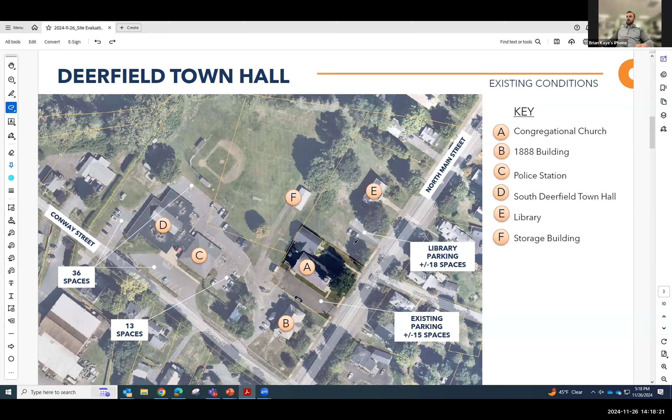Looking back at this slide, this is the campus. This entire area has 86 spaces, which includes what's already at the library in the 1888 building. But there's a scenario where they're going to gain one between those buildings, so we are basically plus 100 spaces.

I'm not worried about the difference between 86 and 87 because there's so many other changes going on. The 86 and 87 are essentially what's there rearranged in some sense because of other work going on, and the green number is additional. So with the 100, you're essentially doubling the amount of parking on the whole campus.

When you count it, you're counting that stuff northwest of that black dotted line. Okay, good, that makes sense to me. I didn't understand the difference between the 86 and the 87, but now I think I do.

Joyce, that target of 100 is based on, as Chris said, seven parking spaces per 1,000 square feet of senior center building. Okay, and then so if I look back at the two-story one.

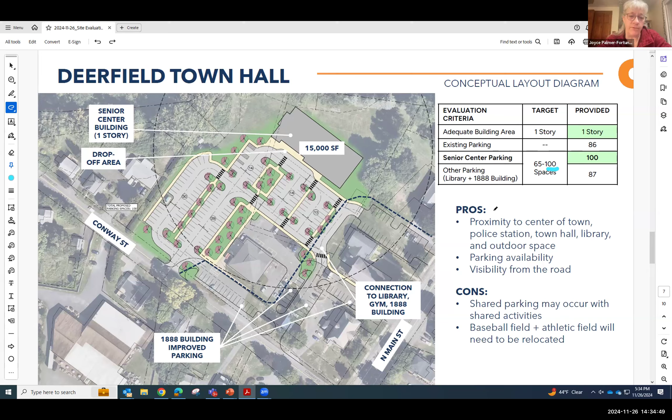So if you were to try to go for getting rid of this ball field, you'd have to factor in the cost of improving the other ball field to be one that people would want to use. Does that make sense to you, Trevor?

The thing about where the other building was, right next to the police department, I believe in the last designs you showed there would be no windows on that adjacent side, and that would cut down on a lot of natural light, which I really am in favor of.

You can put windows in, that's what we had, it's just he was thinking do we want to look out at the parking lot, but certainly we can drop them in. Not high up, but there's room.

The first story, if the back part is the second floor, that's not a problem, it's just the lower one that's right there, that he's looking at.

And we could probably be strategic about what we put up against the police station on the lower level, and try to limit it as much as possible. But you're right, Jennifer, there's definitely going to have to be most likely one space that would like glazing that's not going to get it.

That's my only thought. That's why I do like different other positions, but I don't know what the temperature is gonna be about getting rid of the ball field, because I don't know what the campus plan is - I haven't paid attention to whether you guys are expanding or going in the back there at all.

I have an opinion, but I don't know what everybody else's opinion is. I think that ball field needs to stay.

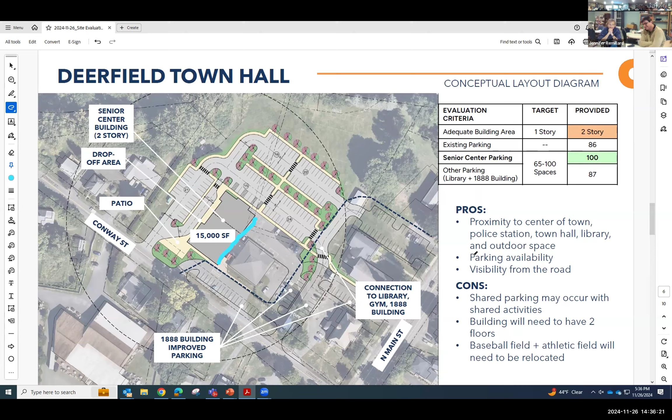Well, they do have community concerts there in the summer, so that would take away a community space. And there is no park in Deerfield to go to - there's nothing other than on the other side of the elementary school, but yeah, there's really nothing for the community to gather at.

Yeah, it's disappointing. Can you build a senior center there? Same reasons. Well, thanks for showing us all these things we can't have.

Maybe let's go to Whately now and see what we got there.

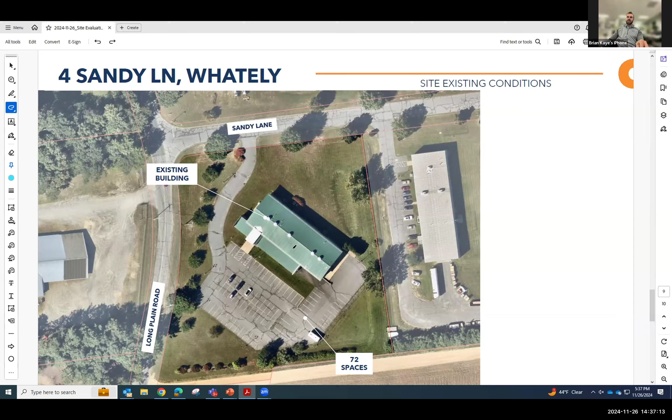So in general, you'll see if they just didn't build this building on a 45-degree angle, you would think a lot of this parking would solve itself. But in this option where we get to the 15,000 square foot program space, we still allow for what you saw last time. I believe last time we were just a little bit under-parked.

So now going up in our square footage, we want to target the same 100, but accounting for a couple extra spaces for existing facilities in this building. We're still able to maintain a nice entry loop and drop off to the front door. You'll see these extra wings and parking areas that could be utilized by staff or overflow for larger events while still providing good front door access. This shows how parking would situate with this building expansion.

On this one, the existing parking is 72. The new layout increases it by 38, bringing it up to 110. So it's not that we end up with 182 spots here, we end up with 110.

That's right, okay, but still in the same framework as the last one. No, it's just because in Deerfield you had to add the 100 to the 86 or 87 for the campus, right. Now we're adding 100 to basically about 10 needed. So the number in green is the total, not the senior center itself. I think based on this we can probably clean those charts up to help explain them better. I just want to make sure I understand what you're saying there, because it's not unreasonable the way you've got it, I just want to make sure I've understood it.

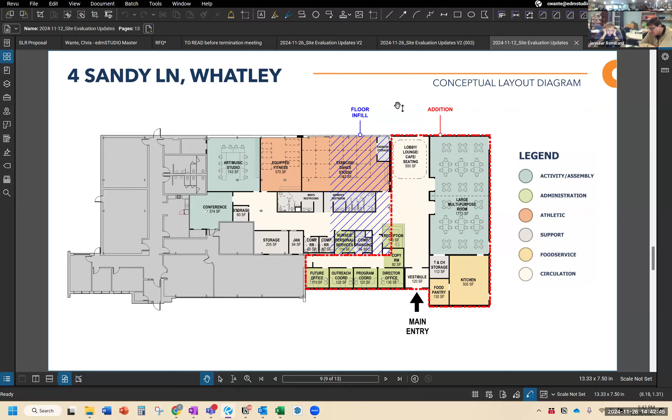Is that just infill or is there useful space there at all? Under that main large room where you're bringing everything up, is it just infill with nothing there? It would only be crawl space, right? There's not enough - it's like 2.5 feet from the slab, so there's not really anything. We'd build it up with metal studs or something like that, probably, and pour a new slab on top of it. So it really wouldn't be anything useful.

But we've done it before, we've infilled spaces before. So I don't think it'd be insanely difficult. I think it's the only logistical thing to do to not have to add a lift or more stairs or a ramp. It seems to work, especially with where the drop off's going to go, with something like this.

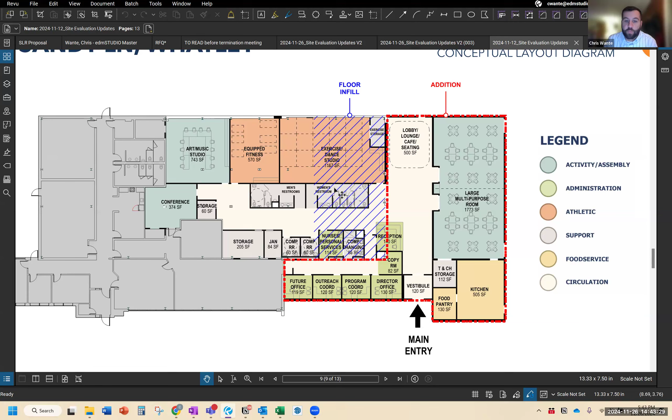So in the plan or the footprint that we're currently showing for the 15,000 square feet, we would be looking at doing something like this. We would just add a little bit off the side and the back, depending on how things shake out. But that's kind of where we would want to grow.

And we would really like to keep this lobby area that traverses through the building, so that if this parking lot in the back needs to be for seniors, there might be easy access through there. If somebody walks in the back door, they can see the reception, and if people want to use the outdoor space, it's easily accessed as you're walking through the building.

I think the layout would be pretty similar to this. We'd want spaces over here and over here to the left of this central spine, but like I said, the space would want to grow to the up and to the right of what you're looking at here on the screen.

I just want to share, Dan has joined us. Oh, hey Dan. Hey Dan.

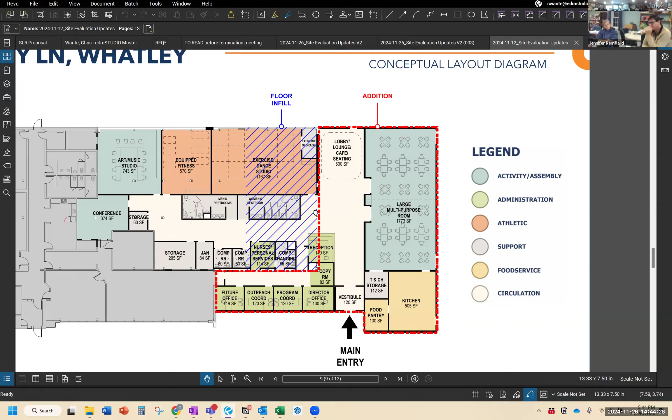So Brian, you want to pull back up the site plans and we can talk more about it?

Oh, I see. Yep. Okay.

And yeah, that whole area to the drive entry there, everything to the left is graded up pretty high. There's a pretty steep grade coming down, so all that space is not really terribly usable.

Yeah, that was my question - if you put parking on the inside. Yeah, you'd need little elevator parking things.

That's right. So those are some options that talk about the target, right? The ideal situation for the building that fits the program that we've identified as desired, with the parking that's associated with it and the different amenities, to varying degrees of success with outdoor space and whatnot.

Both identify the drop off, both we feel like have safe pedestrian access, walkways at every single parking space, perpendicular to the building in most cases. Where there's not, we provided easy access from parking to the front door. So those are kind of the things that we wanted to get some feedback on and see if there's some preference here that we wanted to hone in on further, or any other ideas that might have popped up.

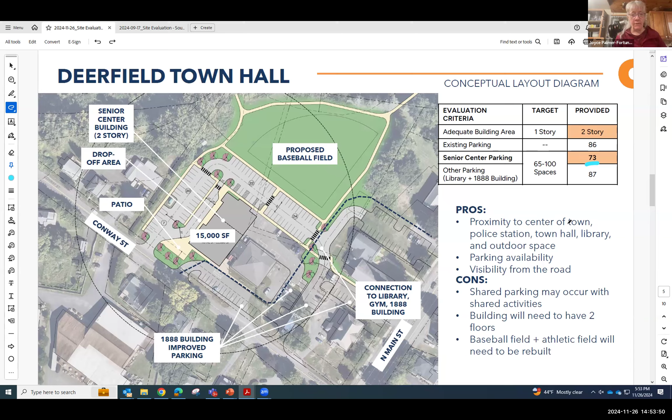In Whately, I think if we do the layout in what you're suggesting here, and it turns out that it's changing the shape of the building slightly in the end, I don't think it's going to change the cost very much. Right, so for the purpose of this exercise, I think what you lay out here will be very similar or the same as whatever might ultimately be built there. You hit the nail on the head on that one. Yep, 100%, we're in the ballpark, which is where we need to be at this point. It's very good.

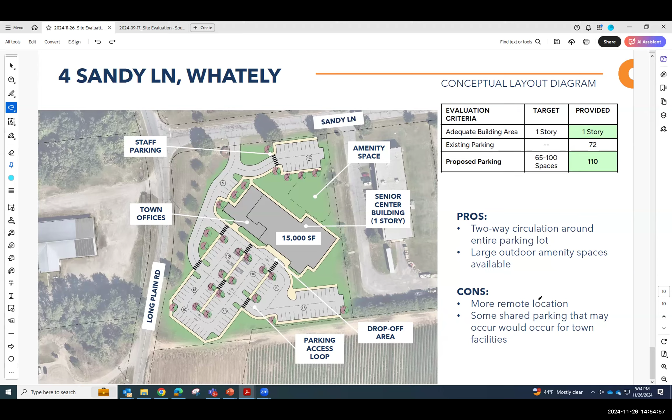Let's see, there's something on there. Doug bounced from the meeting. I guess he lost power. He texted me they lost power, they must be going through some stuff over there. Let me just confirm that with him, but I'll use that as my starting point, knowing that in the future we should be meeting after 5. It sounds like it works better for everybody anyways.